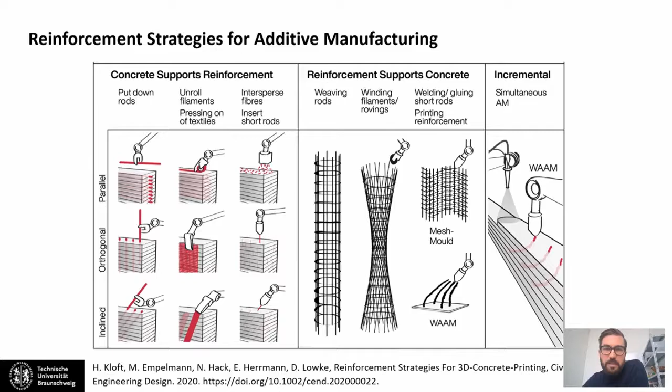Thirdly, and this blends in nicely with some of the talks we've heard today, though I won't cover it in detail, is an incremental process, where the concrete deposition and the placement of reinforcement, by for example wire welding, happen simultaneously. But I'm not going to talk much about this third version, rather today I'll focus on two of these strategies.

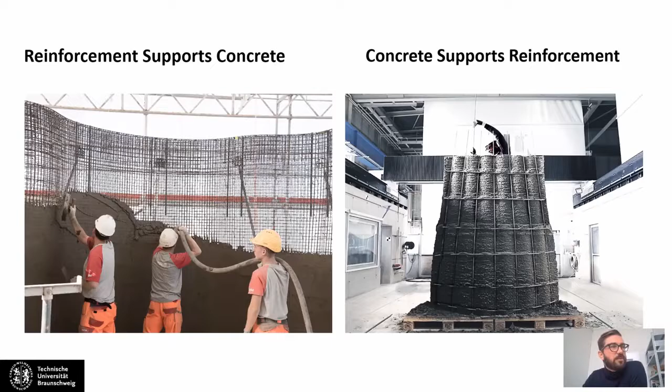The first being reinforcement supports concrete, a strategy I followed in the Mesh Mould research at ETH Zurich. The second, the inverse, is basically concrete supports reinforcement, where there is first a concreting process and then a reinforcement process. Let's start with Mesh Mould and give a bit of history of this project.

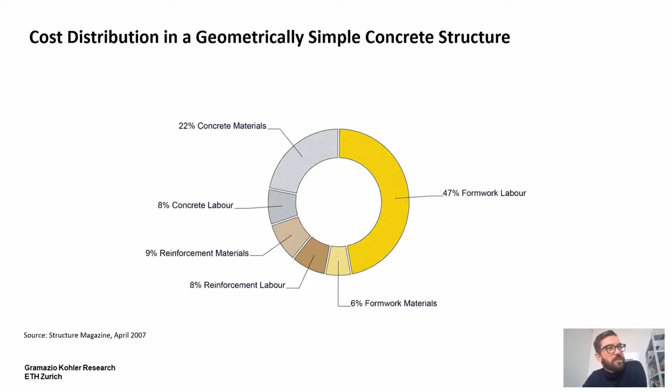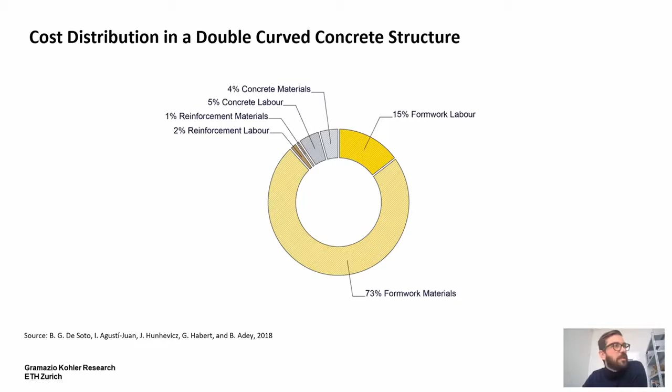The inspiration for this project was threefold. Firstly, concrete structures' formwork costs make up a significant share of total costs, about 50% for simple geometries, and it increases exponentially with geometric complexity, reaching up to almost 90% of entire costs. Second is the high amount of waste created when fabricating one-of-a-kind formwork, as in this example from the EPFL Learning Center in Lausanne, where each concrete formwork piece is one of a kind and often discarded after concreting.

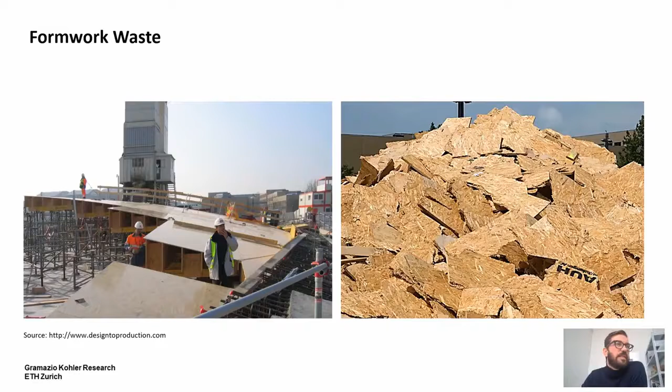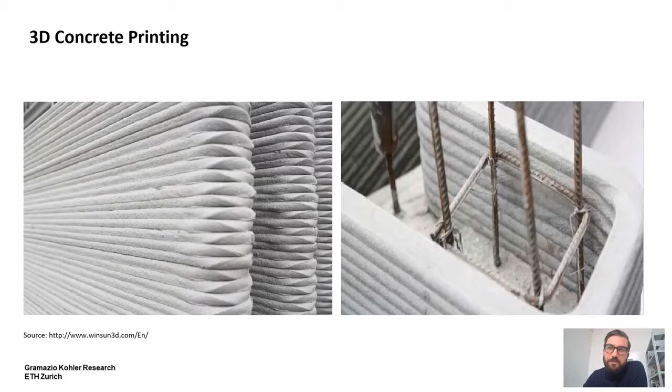Thirdly, and I think this is still one of the large challenges in 3D printing with concrete, is the integration of reinforcement into the printing process. So Mesh Mould went another way. The idea was that a robot fabricates a dense mesh directly on the construction site, which acts as formwork to support the concrete while it's still wet, and which remains within the concrete after it has cured, then acting as structural reinforcement.

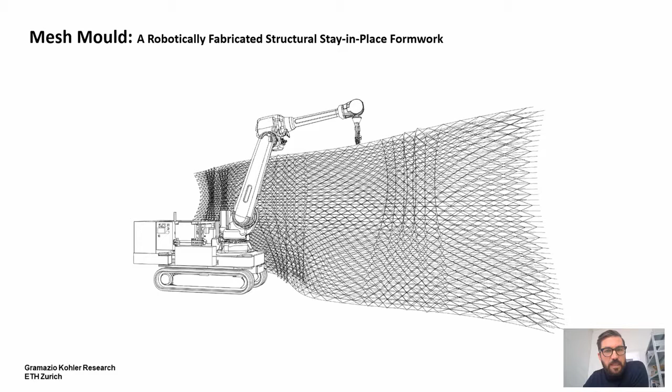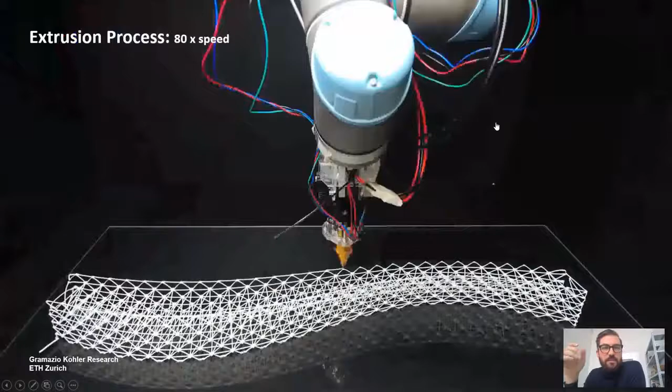This research started very conceptually with a spatial 3D printing process, where material is extruded in mid-air and then cooled down so that it solidifies and stiffens, allowing us to print filigree meshes that can be adjusted towards specific needs, with different curvature radii, mesh sizes, and thicknesses, according to the loads that act on the respective building element.

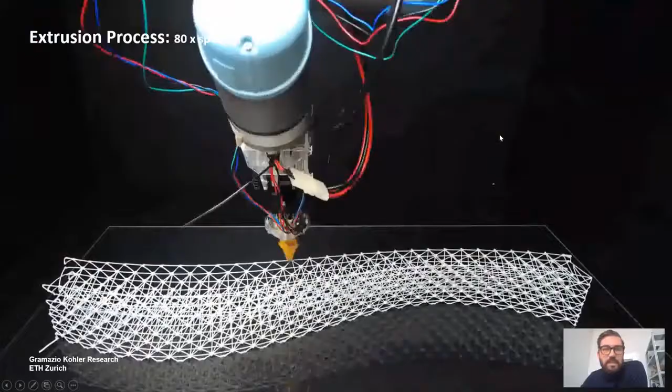This was tested at small scale. It showed very nicely that the high amount of spatial connections really stiffens the structure. This mesh weighs only 120 grams in total, but supports over 60 kilograms of wet concrete without deformation.

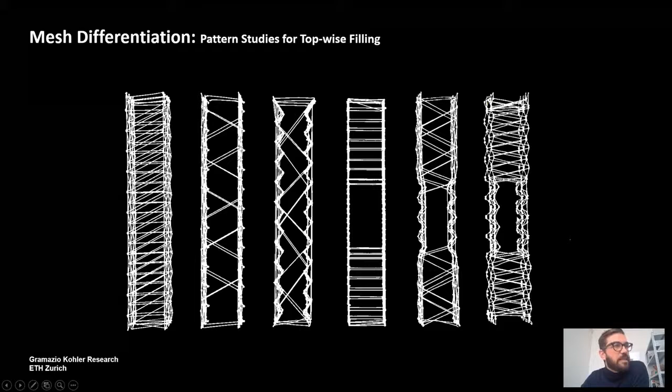This process also offers the possibility to differentiate the meshes according to performative requirements. For example, on the left you see the undifferentiated triangulated mesh, but you can also make it less dense in the middle, deepen the perimeter to make it stiffer, or introduce vertical channels so that concrete can be filled into the structure.

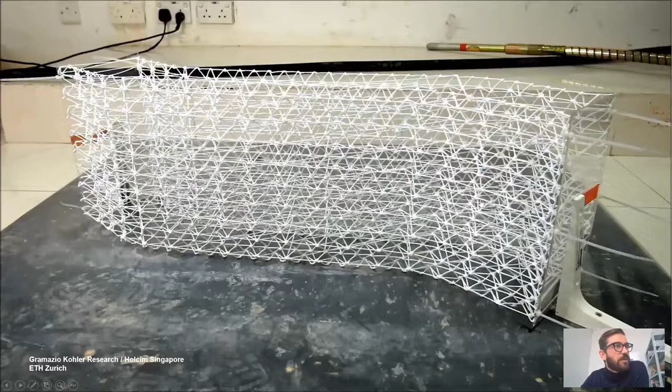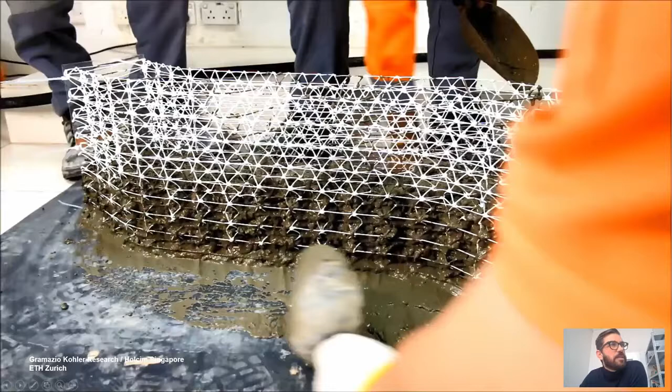Also on the concrete side, there are certain requirements for the thixotropic behavior of the material. As shown here, the material rests within the mesh, and then as soon as kinetic energy is introduced by this vibrating device, the material sinks into the shape and rests inside the formwork.

This turned out quite nicely regarding the formwork aspect, but in structural demands, the ABS material we used here didn't really comply with the structural necessities of the system.

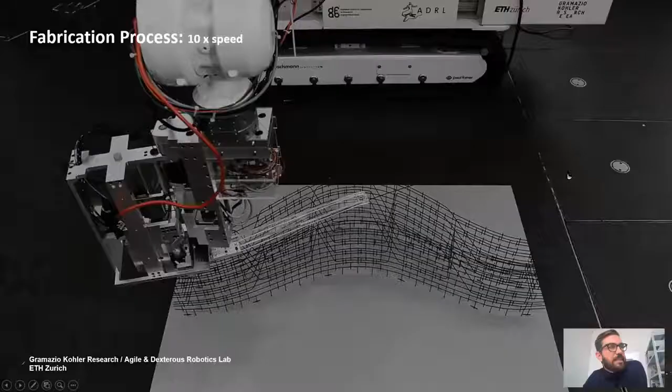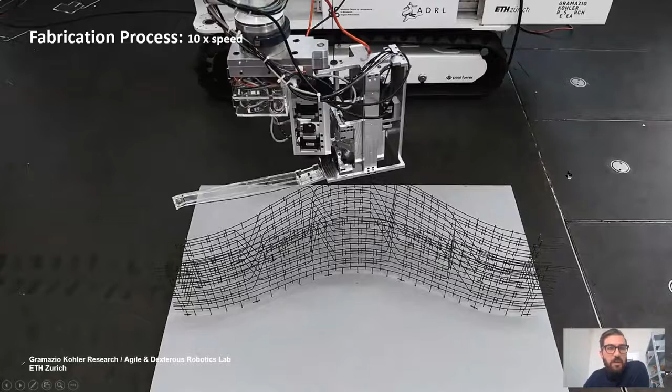In a second experimental phase, we opened up the research to a broader range of disciplines, collaborating with roboticists, structural engineers, material scientists, and partners from industry to translate the system from plastic into steel. Other than the WAAM examples we saw today, here we used semi-finished steel wires—conventional off-the-shelf steel elements—which limits the geometric freedom of those meshes, but increases the speed of fabrication.

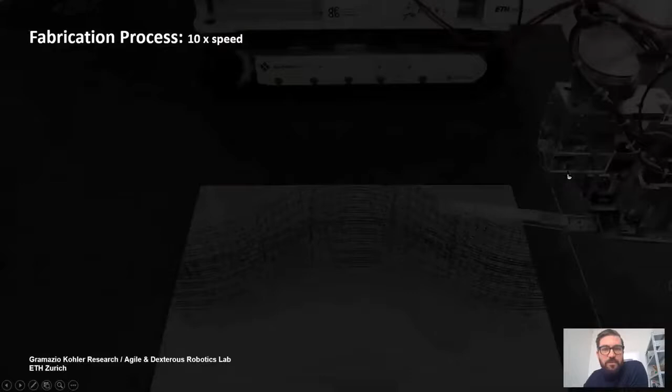These were the first examples. What's compelling is that in usual industrial processes, you often have machines multiple times bigger than the object they're producing. Here this principle is inverted—you have a miniature factory hovering over the structure to fabricate meshes.

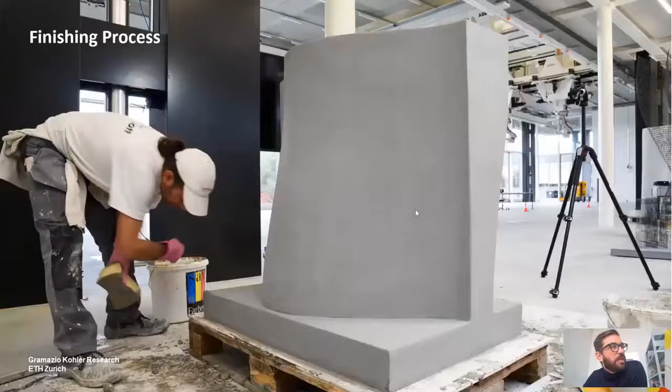Once these meshes are fabricated, the concreting process becomes quite easy. It doesn't require precision anymore—it's basically just dumping or pumping concrete into the mesh, and it automatically takes the right shape. Surface finishing is another aspect; here it was done manually in a craft-based process, but we'll hear more about automating this later.

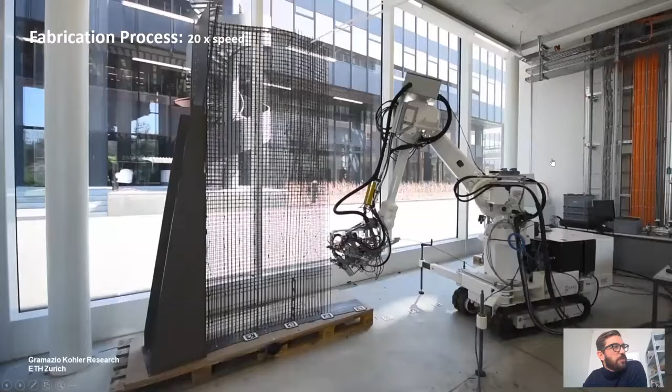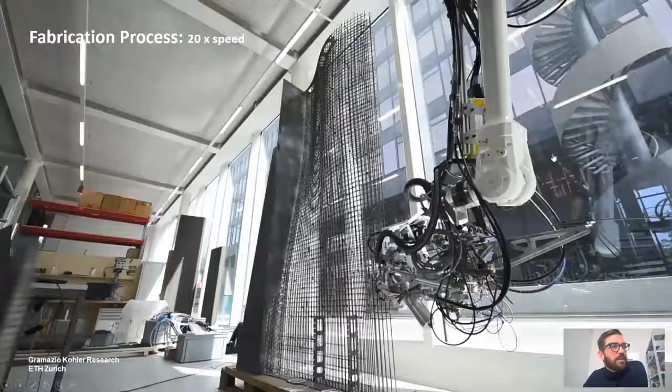The example I just showed was based on 2 millimeter steel wires, which still doesn't comply with any building codes. So we evolved this tool head, incorporating more powerful components, enabling us to process steel rebars up to 8 millimeters in diameter.

These were then tested, and the concreting process was also scaled up. We worked with material scientists to develop a concrete that is basically an impossible mix—it should avoid voids being created within the structure, so it needs to be very fluid, but it also shouldn't run out of the mesh and create material losses.

What the scientists came up with was a mix called spaghetti and meatballs—basically large recycled aggregates that make the structure denser, combined with fibers that clog the mesh openings.

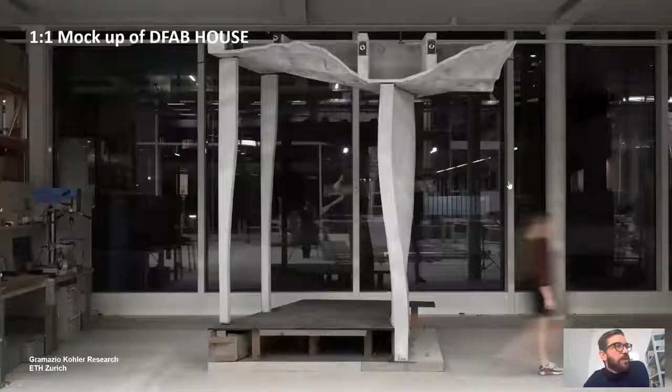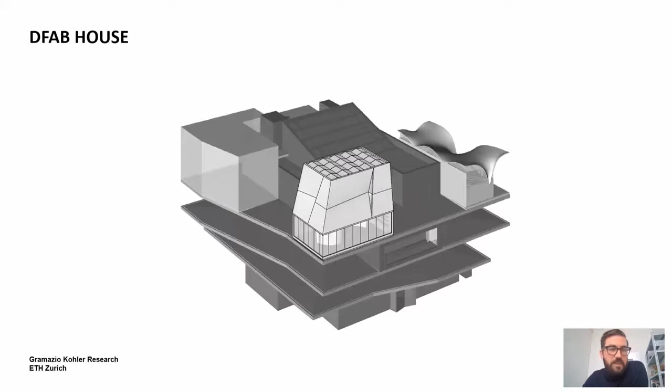We again used surface finishing with shotcrete, and produced the first demonstrators, which were part of a larger structure. This larger structure was then erected at the DFAB House in Zurich—a large-scale demonstrator for digital building technologies, consisting of a variety of processes, starting with a robotically assembled timber structure containing two stories.

Then the smart slab, where the formwork is printed in a particle bed printing process. Then the smart dynamic casting facade mullions, which are extruded, and of course the Mesh Mould wall, which carries the entire load of the structure above—about 80 tons. The backbone itself doesn't take any load; the wall is designed for the entire loads of the structure, and it was fabricated using the in situ fabricator.

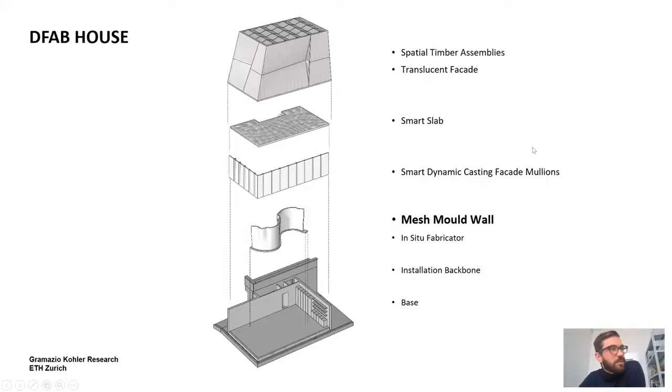I will just let this video run. I hope it runs smoothly—it shows the entire process. I don't know if you can hear the music. Yeah, okay, perfect.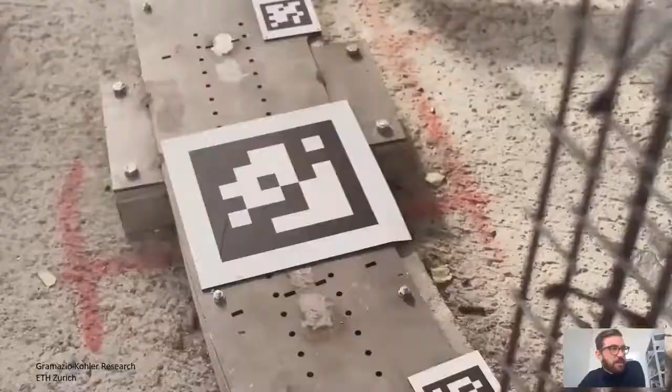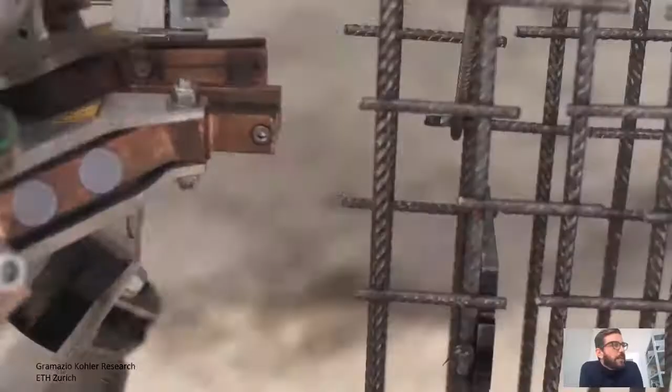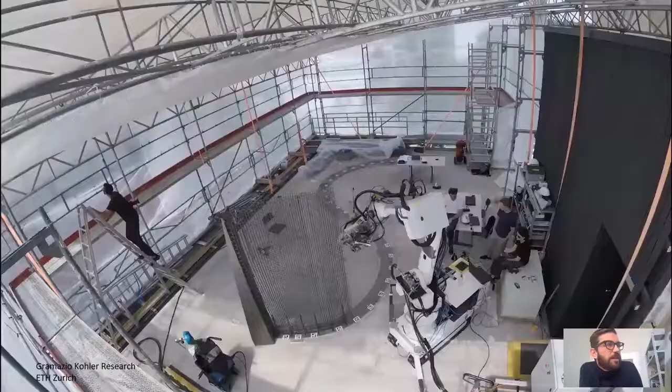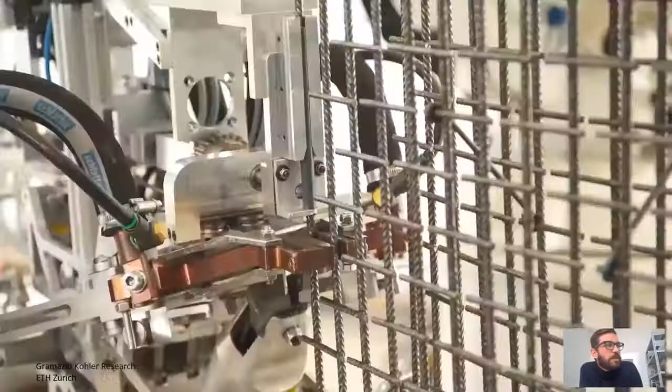This is the tool head with the electrodes, based on a resistant wire—it's a resistance welding process. Then the digital workflow, and then construction on site, where the robot uses these AprilTags to register its position. So the process is based on welding, cutting, and bending.

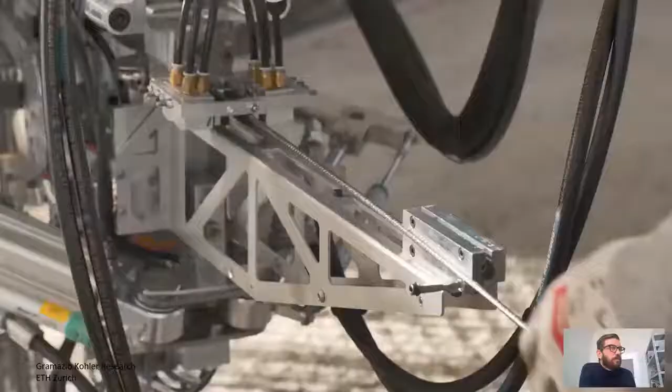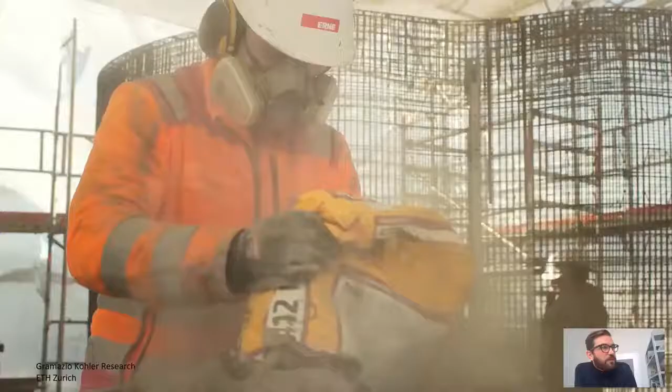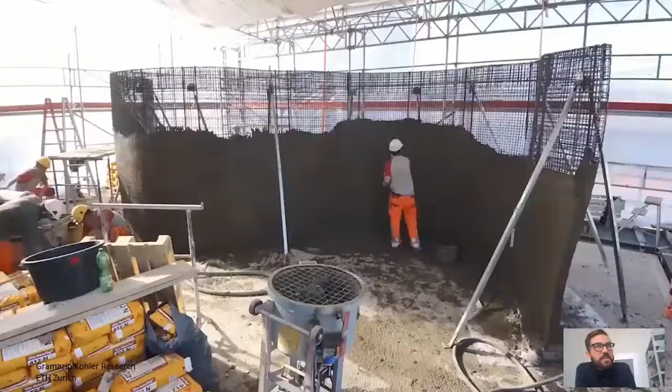So now comes the concreting part, which is still manual and labor intensive. The concrete is just pumped inside the mesh. This is manual but could as well be performed robotically. The advantage is that it's quite quick, so it's done within a working day.

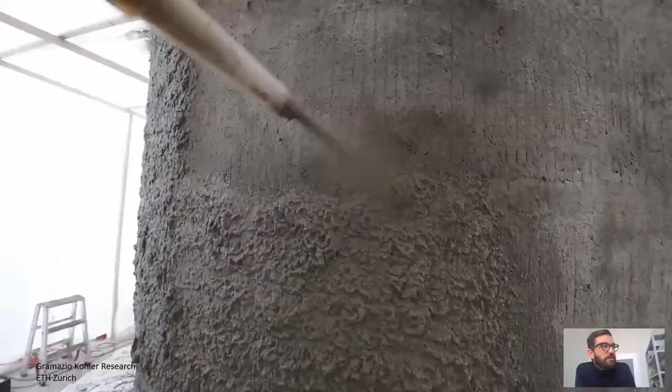And the material is sprayed to cover the steel. And here again, the manual surface finishing process.

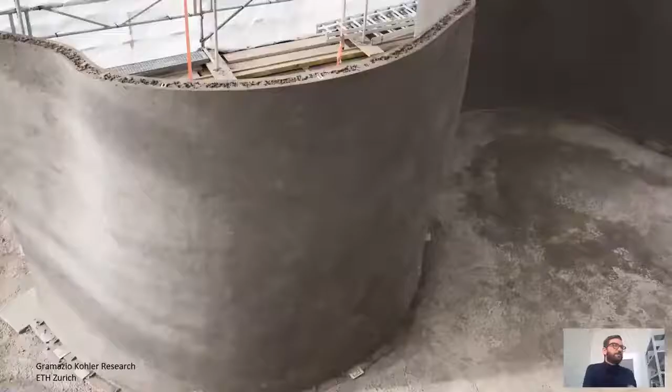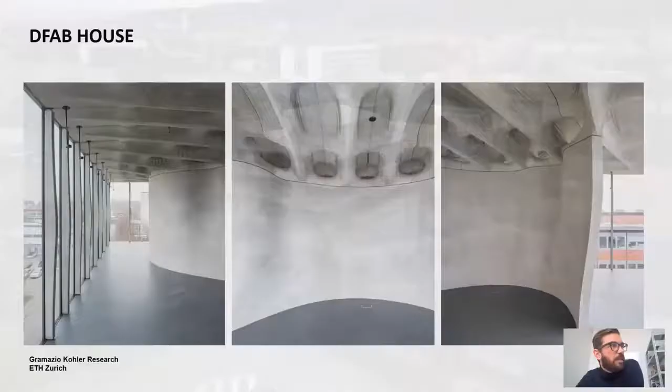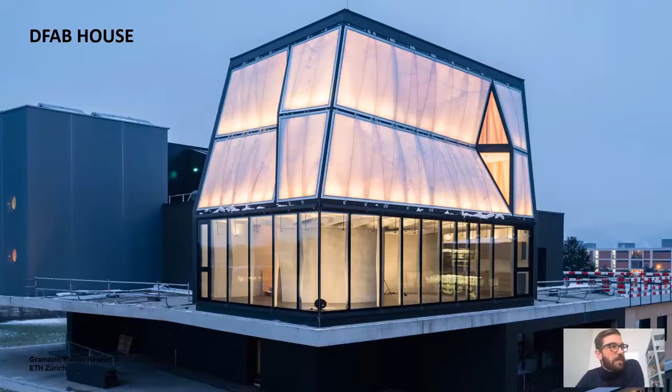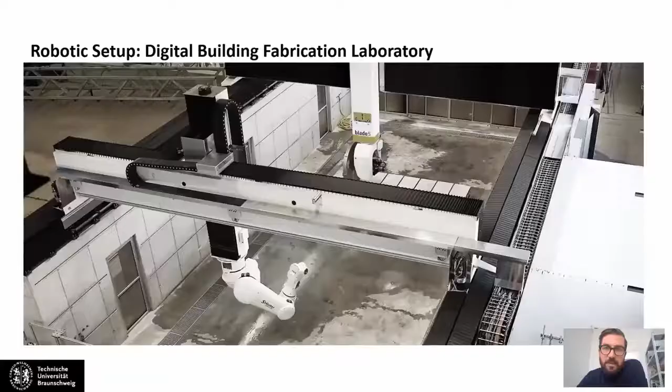Now I want to report a little bit on the inverse of this structure, where the concrete actually supports the reinforcement. This is work we have been doing in the past two years at the Institute of Structural Design at TU Braunschweig, where we have the Digital Building Fabrication Laboratory. It's a large-scale robotic fabrication facility, which contains two portals.

One that is very suitable for subtractive methods, like you can see here. It's this giant saw blade that can cut, but that can also be employed with milling bits and drills and so on. And then a high payload robot, which is very suitable for additive or formative processes.

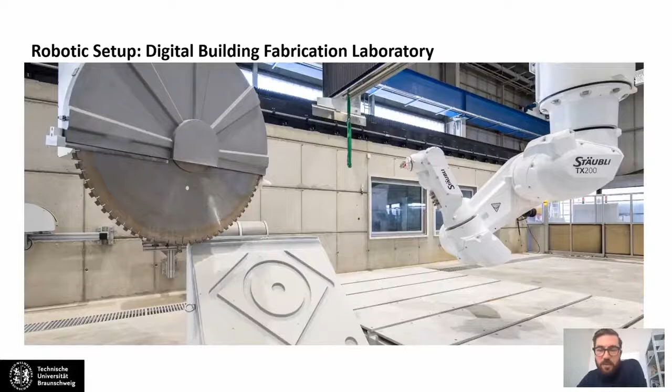One of the first processes that we have been investigating is the shotcreting process, and this is a process that is very well established. It's about 100 years old. The advantages are that it can be sprayed around reinforcement, that it sticks very well to vertical surfaces, and that the high velocity of the projection compacts the material very well.

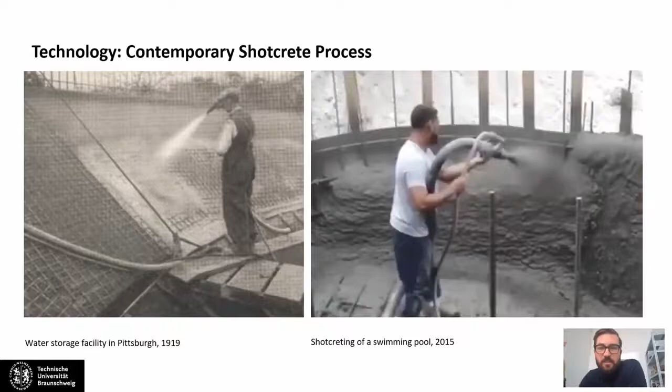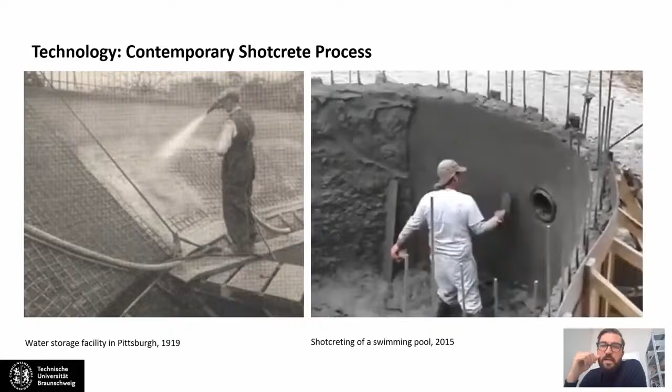On the downside, and this is something you see in the video, shotcreting is generally kind of a dirty process, often comes with high material losses, and is rather imprecise and very labor intensive. But in combination with robotics and sensor control, the disadvantages can mostly be eliminated, and the potentials of this fabrication process can be multiplied.

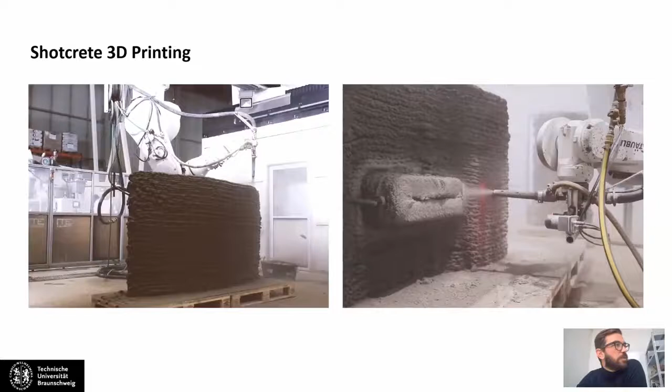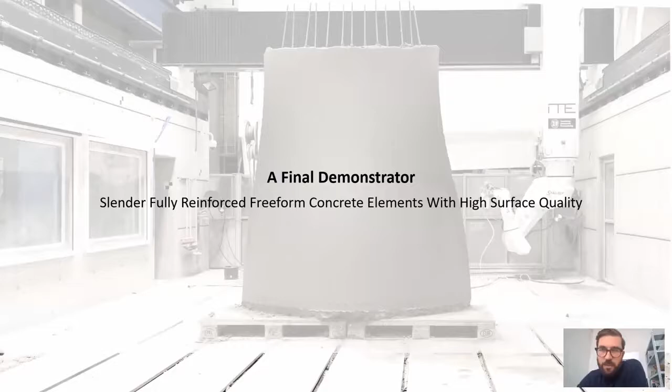So much for the technology. In a recent demonstrator, we then developed a reinforcement strategy based on this concrete-supports-reinforcement approach, which is basically the inverse of what I've shown before.

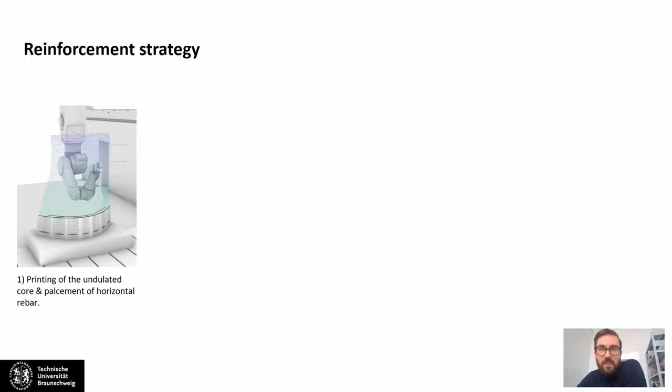So the process starts with an input geometry, some kind of arbitrary double curved wall element, which is then in a computational process modified to include these undulations, so that every 40 centimeters a pre-bent horizontal reinforcement element can be placed.

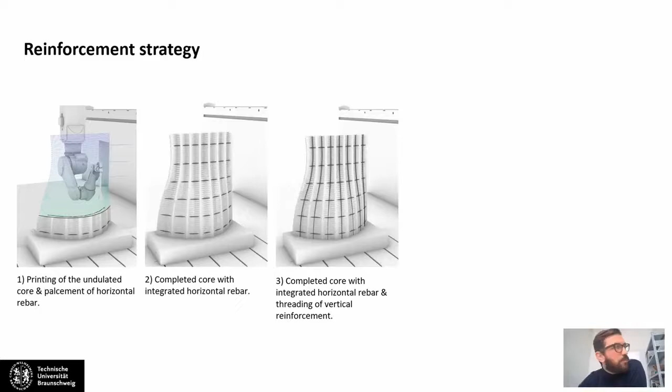Over the entire height of the structure, this creates vertical channels where unbent reinforcement, in this case 12 millimeter rods, can simply be inserted and in an additional vertical printing process be embedded structurally, and also automated surface finishing using different troweling devices.

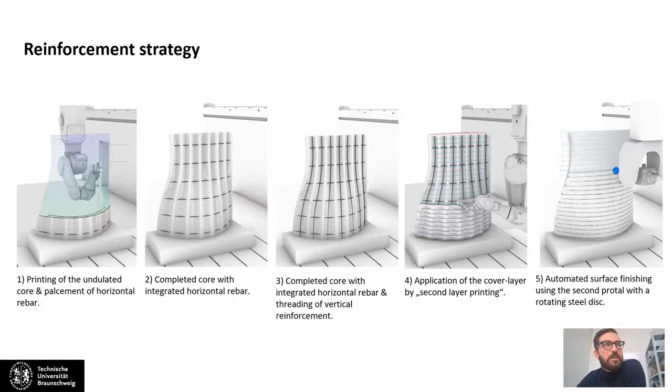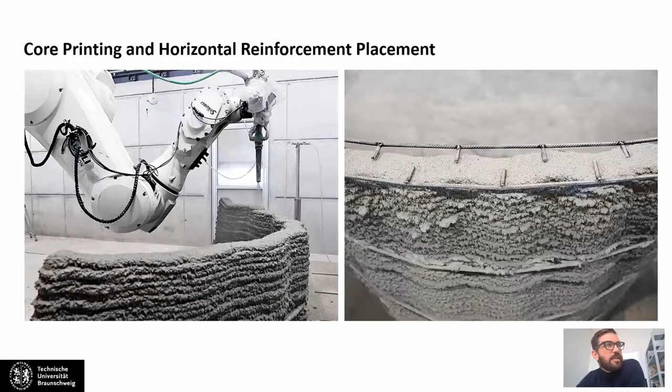So here are some pictures from the process. The robot prints in 3-axis manner. Then these prefabricated rods are laid only on the tips of these undulations. Then we cut the corners to be more precise.

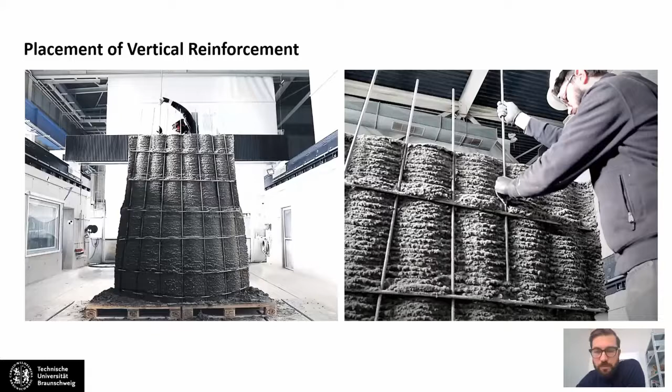Just slide in the reinforcement from above, which is over the entire height still very flexible, so it doesn't require any pre-bending. Then comes the covering process, where the reinforcement is embedded and then troweled and surface finished with the other 3-axis portal.

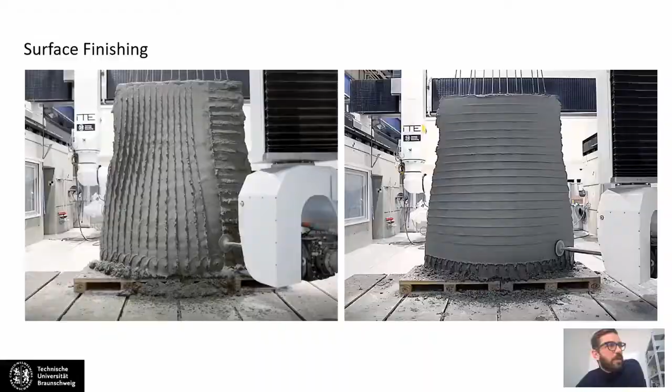And also here, I would like to show you a video of the entire process.

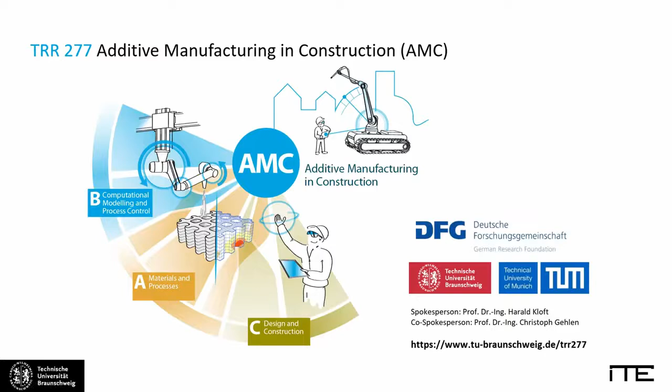Thank you very much, Norman, for this impressive talk. It's always great to see the scale in which you operate in Zurich, but also now in Braunschweig. And I guess that's an important thing to really go one-to-one. What are your thoughts on that?

You started small scale. We saw that in the first experiments with the plastic extrusion. Now it's real architectural scale. What does it take to go from model into one-to-one?

Many of these things you can really only test at one-to-one scale, but of course this is also always a tremendous effort in terms of materials and labor involved in these large-scale experiments. So many of the things that we are testing, we are actually kind of glad to test at small scale first, as much as it's possible. Of course, certain things do not scale very well.

Others do. For example, we can investigate how reinforcement can be placed in a robotic pick-and-place process and so on. So whatever is possible, for the sake of being able to work with lean teams, we try to do on the smaller scale, and then eventually test it up to actually verify that these assumptions are correct.